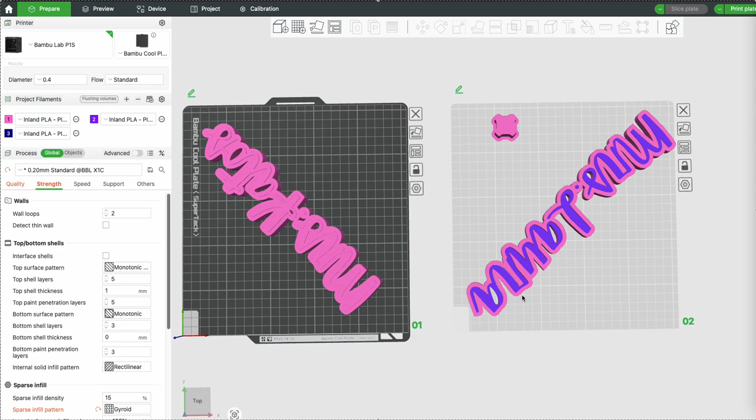However, this week I did have a custom order I needed to get done for my son's teacher, no rush for that. Both items are printed, as you see here on the screen, in the color arrangements requested. They printed out beautifully, but I'm still struggling with the issue I experienced just this morning.

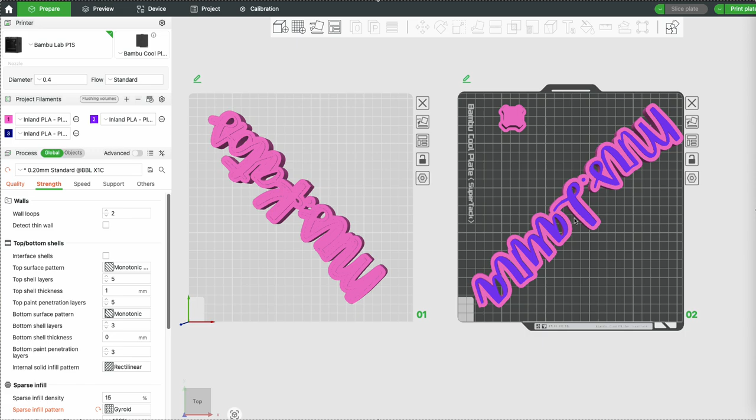What I noticed was - on the left side, my default number one color is pink, number two is purple, number three is navy. The item on the right is colored as requested, pink background, purple foreground - it's like a millimeter or 2 millimeters above the pink. On the left, we wanted a navy blue background with pink foreground, pink lettering.

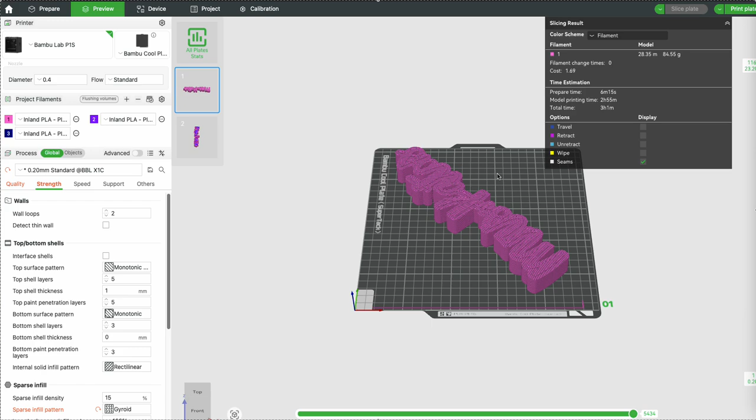So if I slice this - I already did slice it - but if we go to the preview, we see I got one filament, no change and total time of 3 hours, 1 minute. This came out great. If we look here, this should be about the same - it's a smaller item so it's taking a little less time, but no filament change.

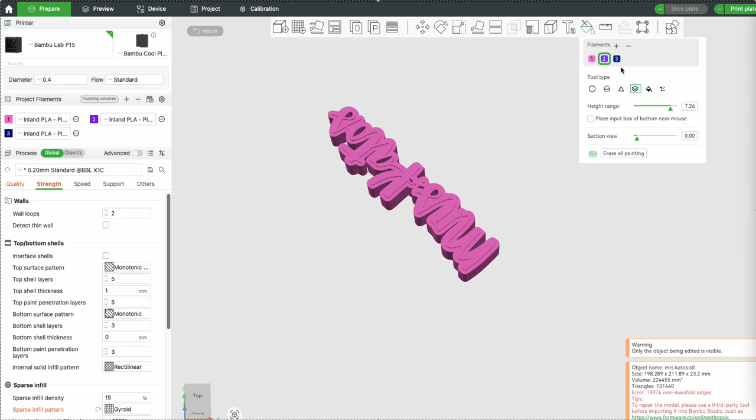Now here's what's interesting - how I normally handle this if I want two plates with varying colors. I select this and my painting tool, take the color I want, take my height range as high as I can go, and just color this whole thing in.

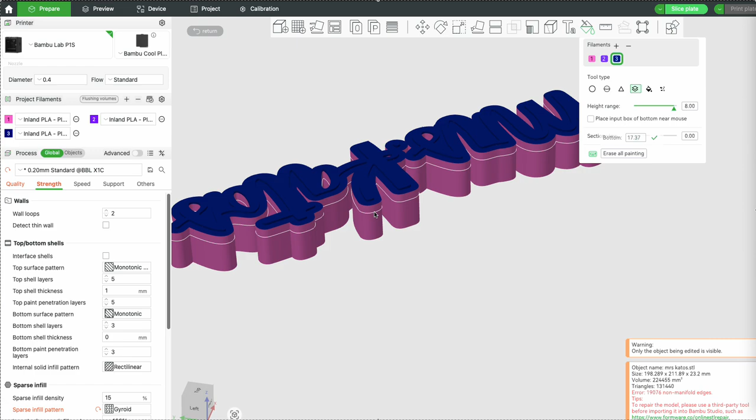My assumption is, this is how I'm normally working - if I color the top plate here, that whole layer is affected, it's not like I'm doing it bit by bit. So I'm going to go down the row here, down the line. I'm going to paint this for you live, as choppy as this video is - I must have a lot of processes going on here today.

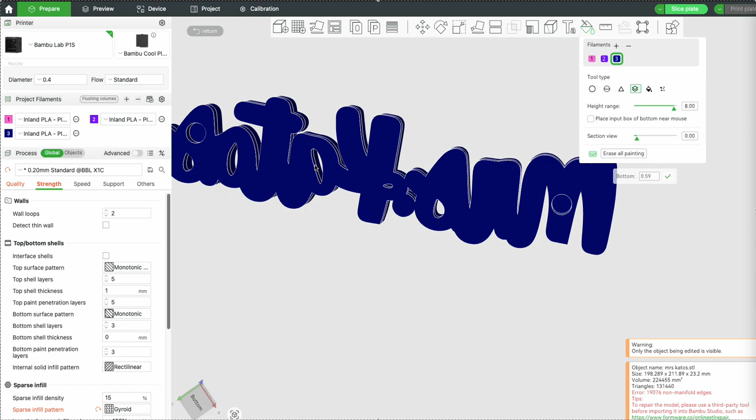So this should be all blue, right? You can see inside these little spots here - there's no pink. We can zoom in, there's no pink here. However, watch this now.

I'm going to zoom out and let's hit return. Check that out - there's pink. There's pink in here somewhere. So let's slice it and have a closer look.

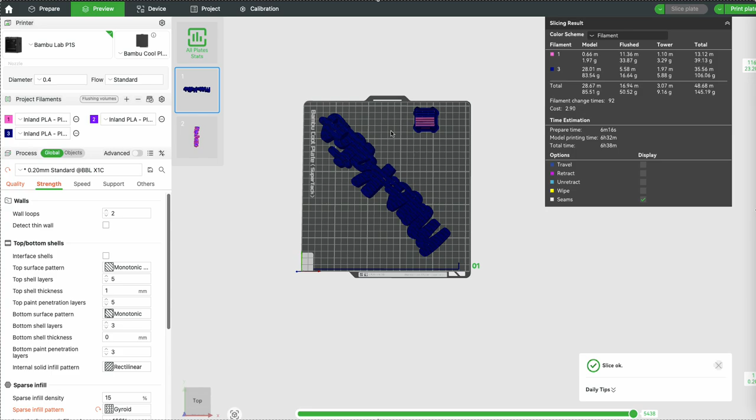All right, and as you notice, this is all in real time. So while it's not much, it's actually a significant amount - there's 39 grams of pink in here. Where's the pink? You see that?

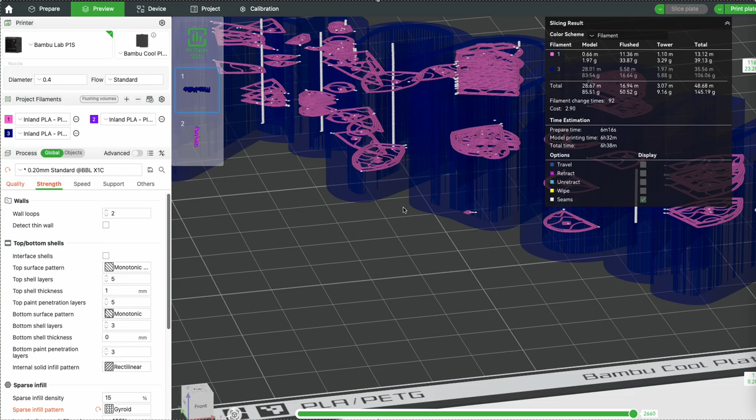Here, let's get rid of the blue. There's all sorts of pink. Why is that happening? We should be seeing this in every little section, but it's not in the whole - there's no rhyme or reason why this should be pink.

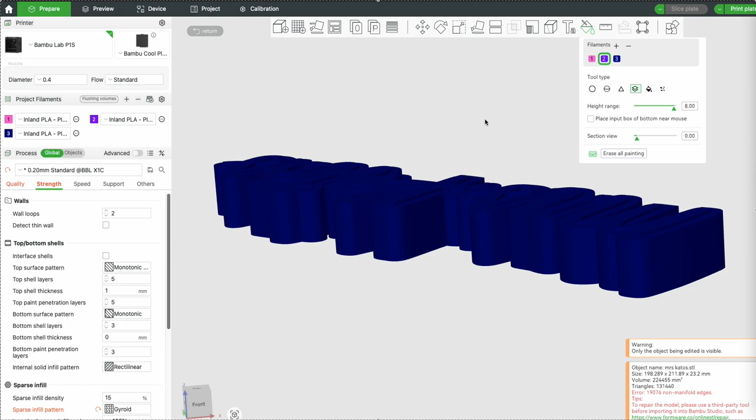So for some reason, that layer - the layer tool, let's see what's it called, the proper term, the height range - the height range is not really coloring the layers in properly. This should be coloring everything in.

Even if I go over it again - oh, now it's in purple. Sorry, let's do this one more time. I'm going to color this in. There, let's use purple - same thing's going to happen, color from the top to the bottom.

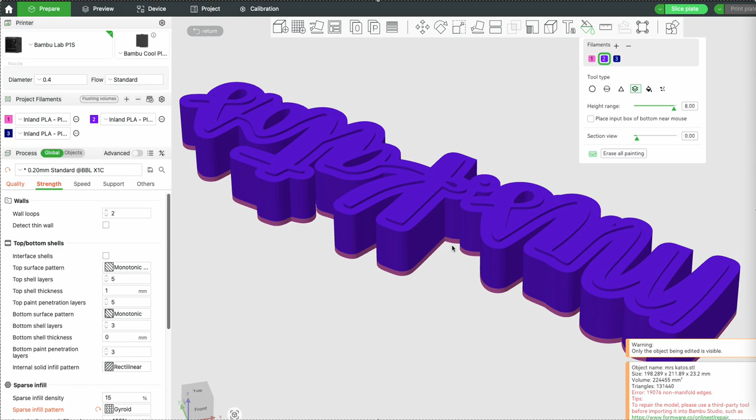Now this, I don't ever recall this happening. I've got dozens, maybe 200 or so files where I've colored in multiple objects on the same plate, and I never had an issue. Every object, even if they're different colors, none of them exhibits this sort of issue. Now let's return here.

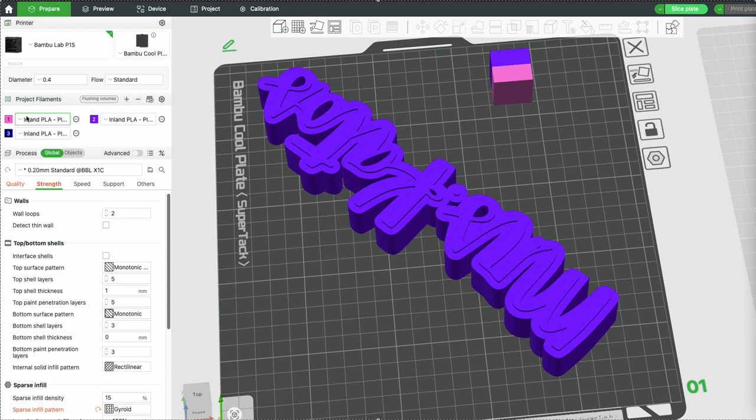Yeah, see that? Now let's revert this. Let's erase that, make that pink, and there we go. Right? So now that everything is totally pink, I don't have the issue where I've got multiple colors in here.

I know this is drawn out a bit, but in a nutshell, this is what I'm experiencing. So I don't know, is this a bug? Have any of you experienced this in the past? I don't think I have.

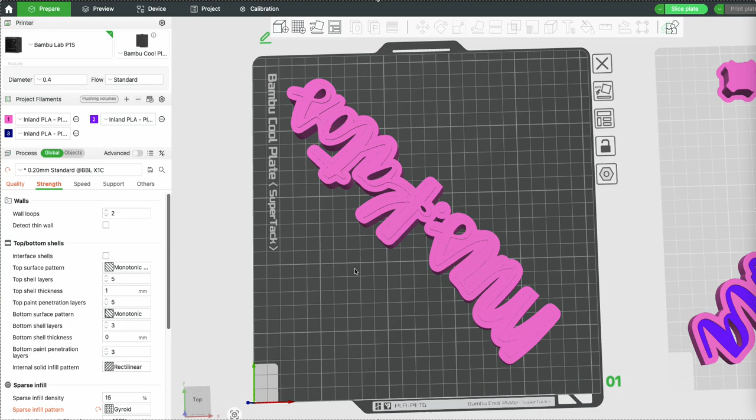I can go back and with you here, and here, I made this object here on the right before I did any updates. So here, let's take a look.

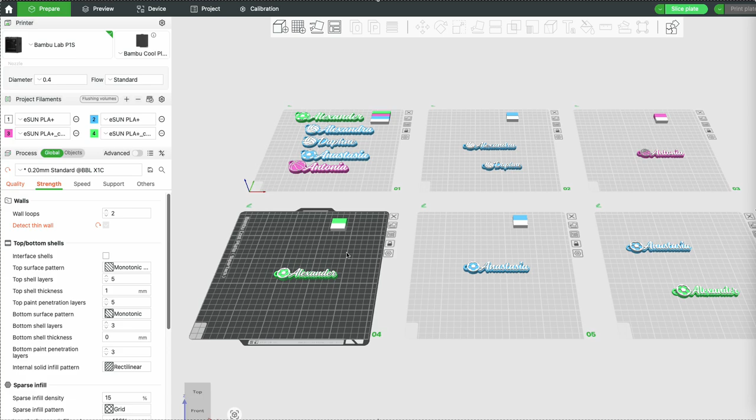It's obvious. I've got my multiple colors here on the left - my white, blue, pink, and green - and here, all I have is green and white, blue and white. The issue was not exhibited here before I made the update. However, here,

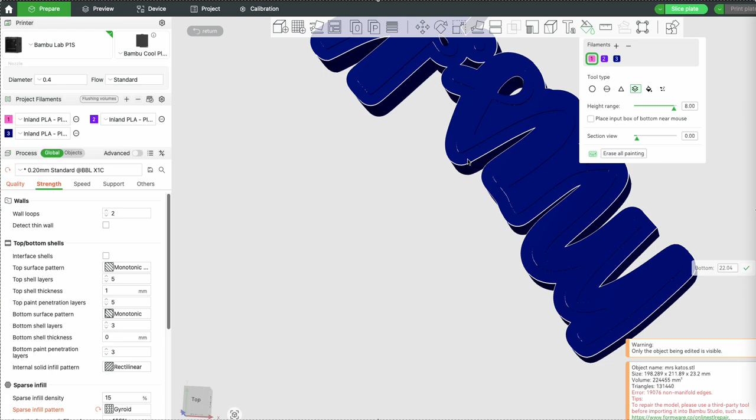it is. And let's say I do decide to color this all. How did I do this? Okay, so let's say I'm just going to do that. And then that. Okay, that's what I want.

There is going to be white in there. There's going to be, I mean, another color in there somewhere.

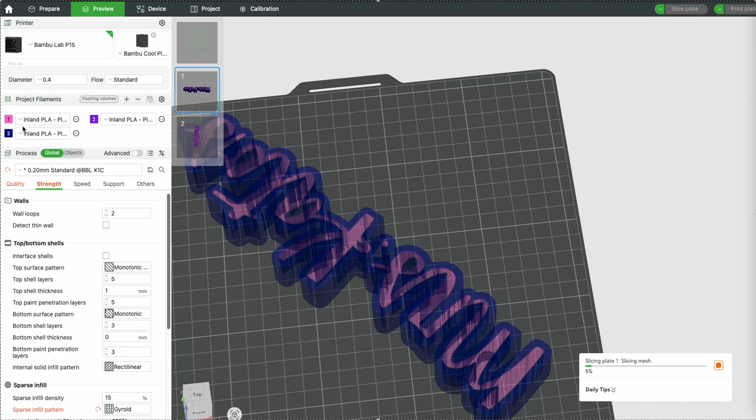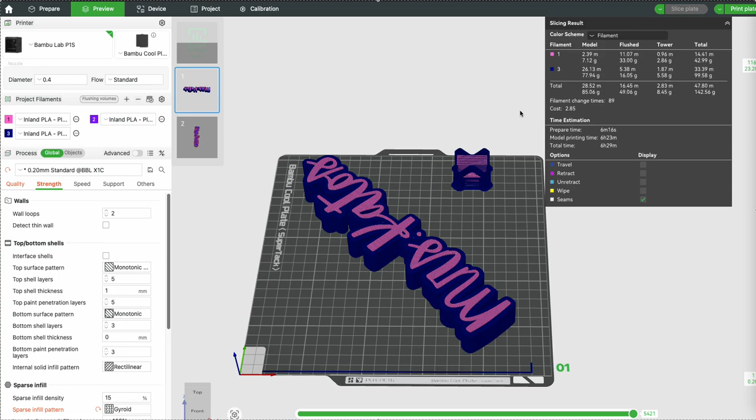Six hours, 89 filament changes. Right? How does that make sense? Why is there 89 filament changes? 89 filament changes because there's, you know, there's something weird going on here.

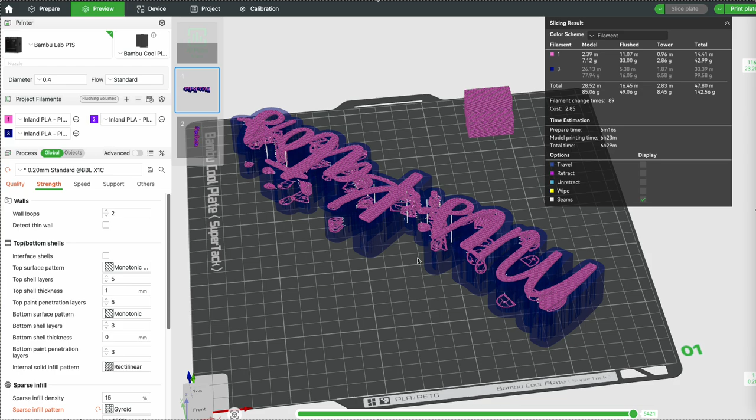See that? There's 89 filament changes because there's all this junk in here. Why is that? So you see what I'm talking about. This 6 hours, that's unrealistic. I mean, 3 hours I can understand. 6 hours, that doesn't make any sense at all.

Now, if I were to reverse that, so let's do this. Clear it all. Let me do the opposite, the inverse, just for argument's sake. I'm going to do that. And then that. Let's go back and slice.

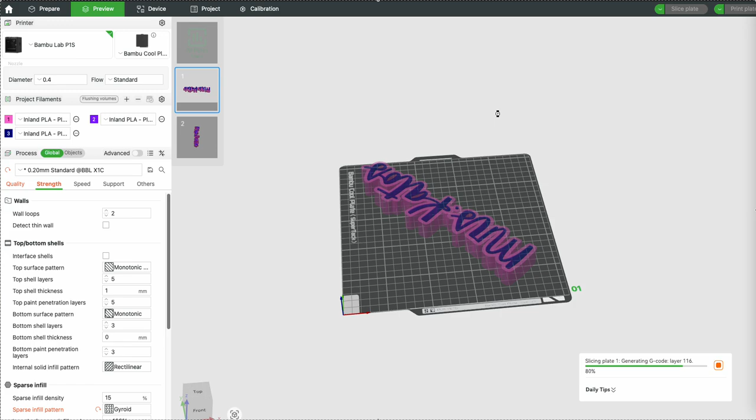And there we have it. One filament change, 3 hours and 5 minutes. What's going on? I think there might be a bug here.

I don't think that that layer tool or the height range tool is functioning properly. And that could be a result of whatever changes that were made. Maybe not all of the functionality in this application was entirely vetted

when this update was pushed out. Now, I don't think that was intentional. The folks who were doing the QA testing likely tested just what was being affected, not everything else in the application. In my day-to-day job, this is something that I would normally do if my company is pushing out a project or product or a significant update, version update to an application.

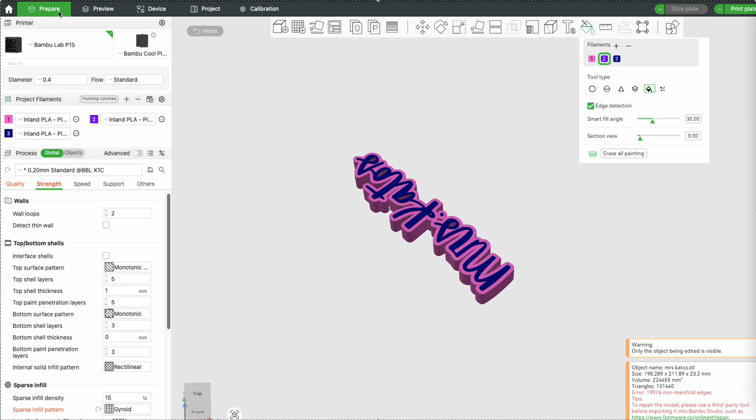Before I pass it on to my employees, my people, whether I receive it from a vendor or if I'm in a position where I'm the vendor, we'll test if something's being, for example, if we're making changes to the device screen, right? I would still feel compelled to come here and test all of these other features out.

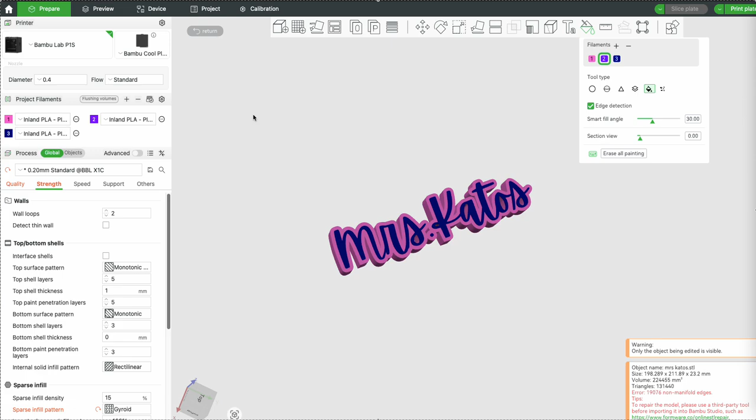You know, just as a sanity check, right? Because while the developers are not intending on affecting anything in the screen, perhaps something touched on this screen did affect it. Who knows? I don't know. I'm not a Bambu developer. I'm just speculating. I think I found a bug.

Maybe I didn't. This video has gone on way too long. I hope you were able to catch the issue that I was trying to convey, or am trying to convey. That's it.